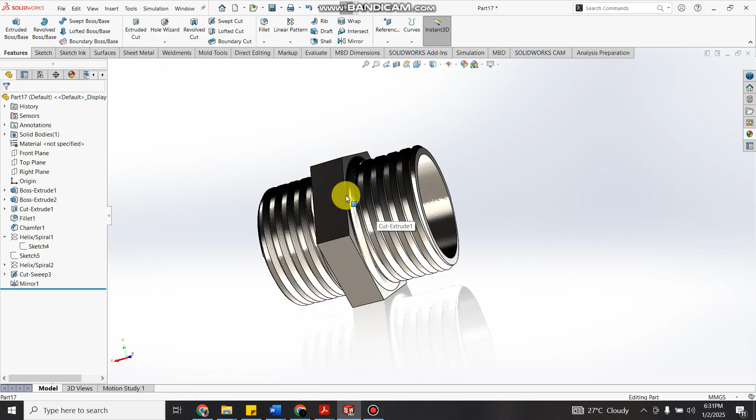Today I'll be doing a little design on a pipe nipple. As you can see, I'm doing a little design on a pipe nipple using SolidWorks. So this particular model was done using SolidWorks from the start to the end. I can show you the basics.

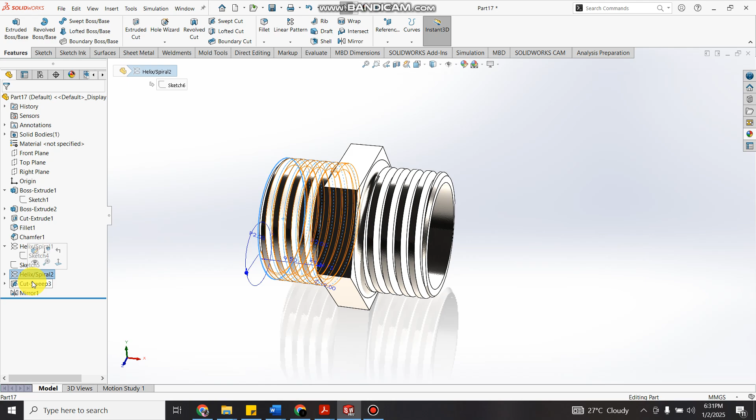From here, sketch, features, come to sketch again, extrude cuts, fillets, chamfer, helix and spiral, sketch, helix and spiral, cut, then you mirror. So please, let's see how we can get this done.

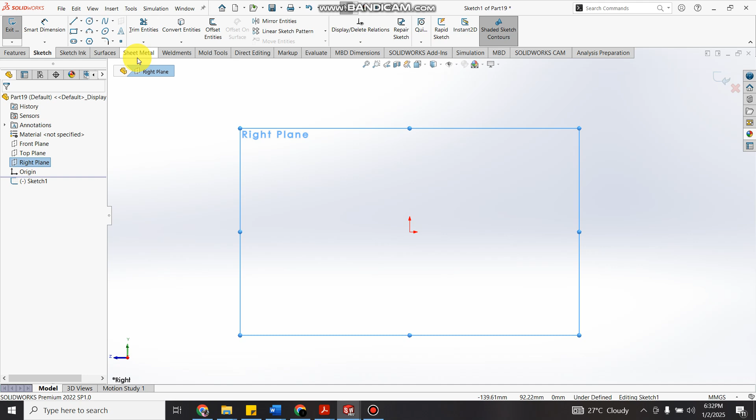Ctrl N, parts, okay. Go to right plane, sketch. The first thing I'll do, I'll go to my circle. I'll click on the circle. I expand. Come here. Come to this point. Dimension it 19.

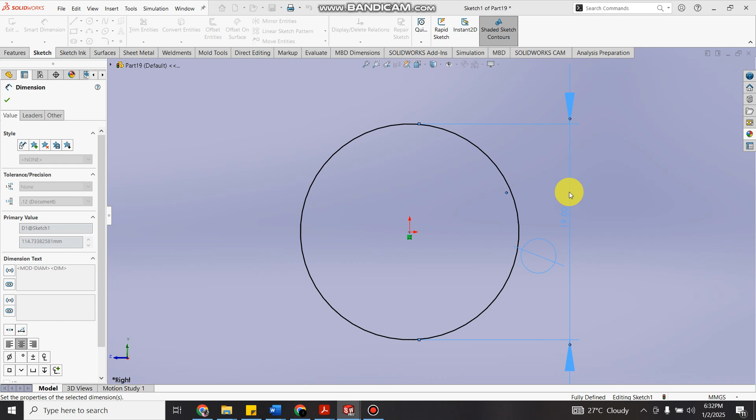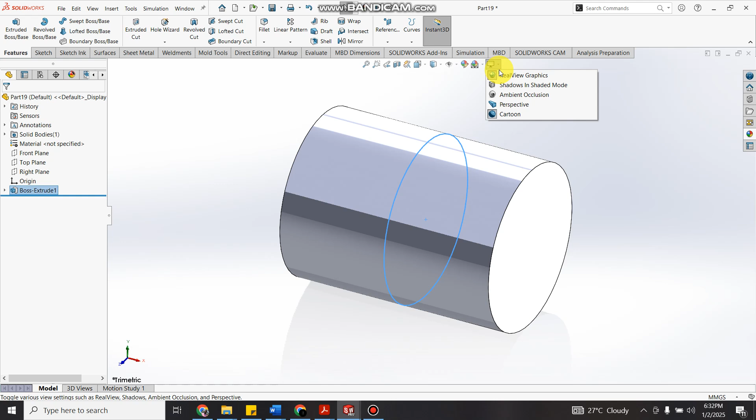After doing that, I'll go to features. Click on extrude boss. I'll make it 25. I'll use a direction of mid plane. So this is how it's supposed to appear. I've been able to get this done, as you can see. Next thing, watch. Use the right plane again.

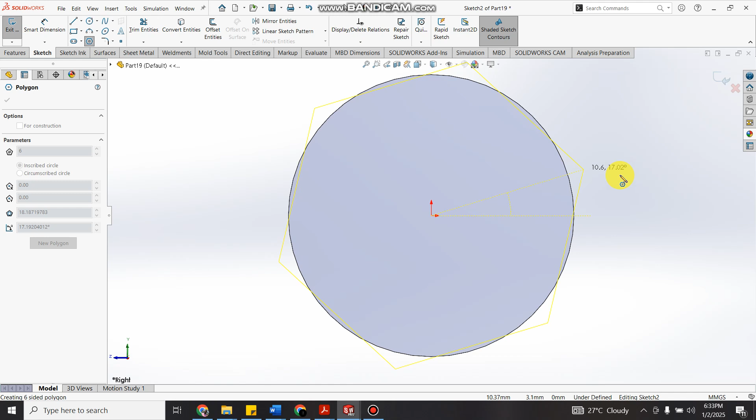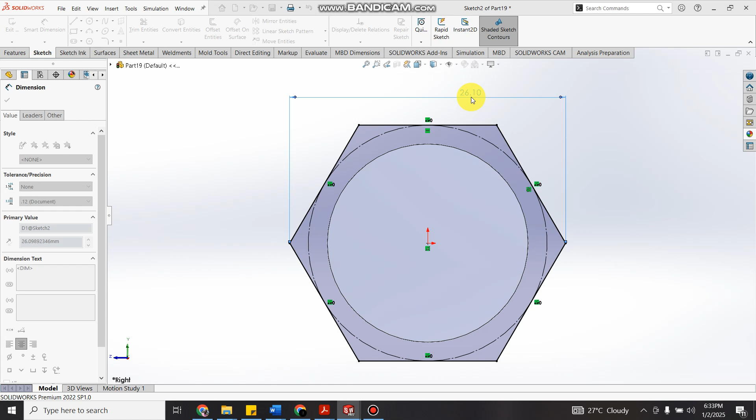Since I want the polygon to be in the center, click on sketch. Come here. Polygon with 6 sides. So let's assume I mistakenly do something like this. I'll click on this. I'll click on this. I click horizontal. I'll have something like this. Then the next thing is our dimension. From this point to this point, I'll dimension it as 25. Check.

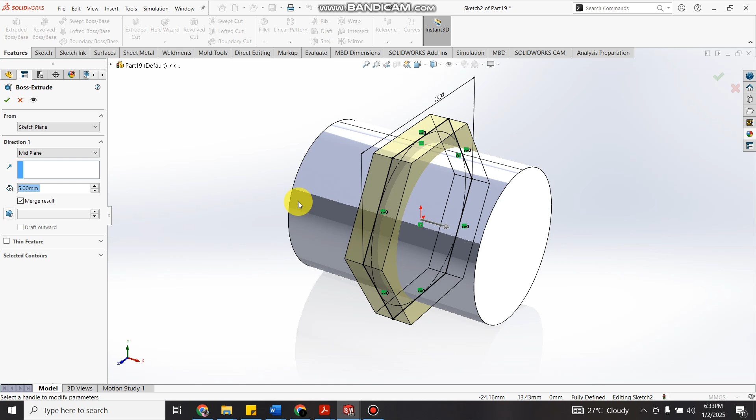I'll rotate mouse, features, extrude boss. The thickness is going to be 5. Here I see 25. Come here and input 5. I should have something like this. So I've been able to get this job done, as you can see.

But the next thing is, I'll come here, click here, sketch. I want to produce the same line. I'll click here, I'll click on convert entity. And I'll click offset entity. I'll click here. Then the thickness is 1.50. Then I'll click on reverse. Check. I have double lines with the thickness.

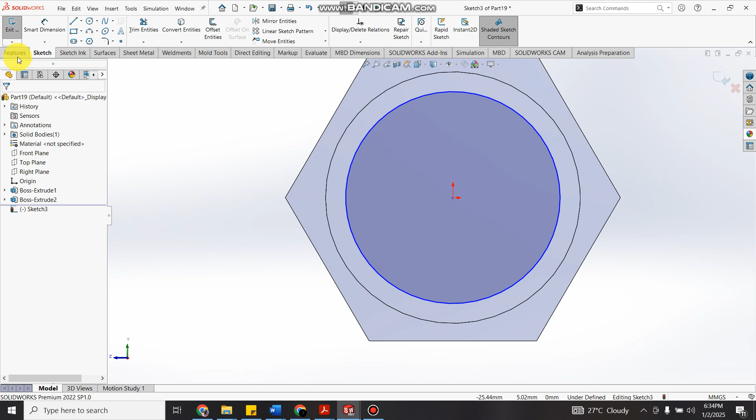I'll go to trim entity. I'll click here, move it a little, and remove that. Then I'll go to features. Extrude cut. I'll click on through all like this, so it appears like this. As you can see, I'll check. Now I've been able to get something like this.

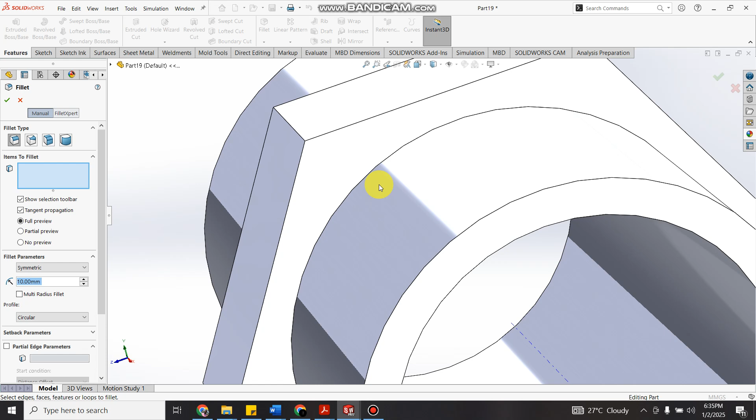Now I'll go to fillet. I'll come here, click here, go the other side, come here, click here. Thickness is 1. As you can see now, I'll check. I should have something like this.

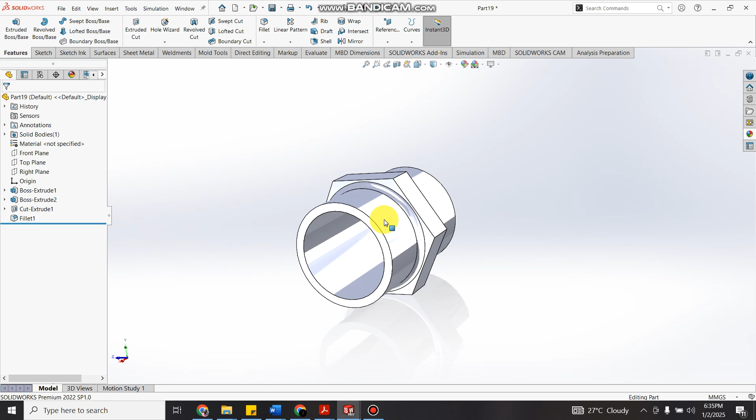And the next thing, chamfer. Drop down arrow, I'll click on chamfer. Now I'll click here. Come to the other side. Come here again, I'll zoom in. And I'll click here. 0.5. Click here. I've been able to get this done now.

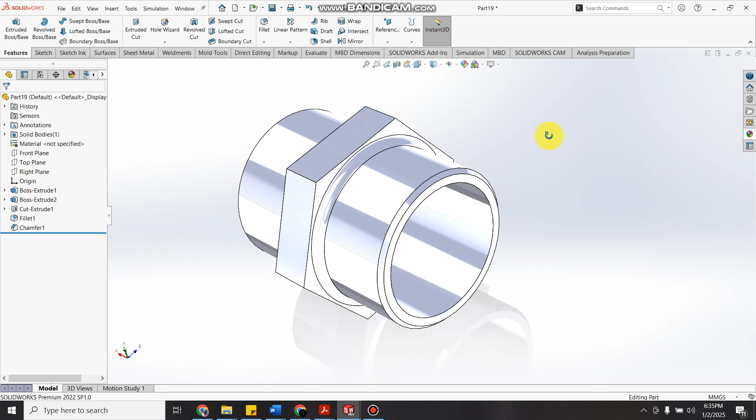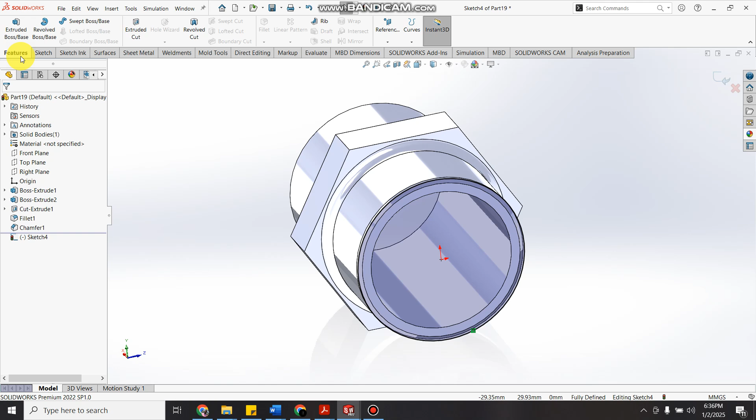So what's the next thing I'll do? I'll click here and click on sketch. I'll just bend it a little. So I'll click here and I'll click on convert entity. Then I click on features, I come to this part, I click on helix and spiral, I input my dimension, pitch 2.0 and radius 4.75, diameter 19, height is 9.5. I've been able to get this. I'll check.

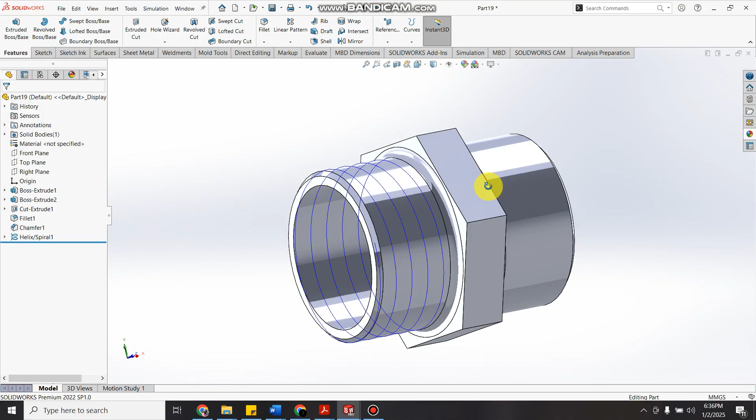After doing this now, I've gotten this. As you can see, I just need to do this side, then I'll mirror it to this direction here. No need for me to do the same procedure. I'll come to this point, use a front plane, I'll click on sketch. I have something like this now. Zoom in. I'll use this, do something like this. My lines. Then I'll zoom in properly so you can see it.

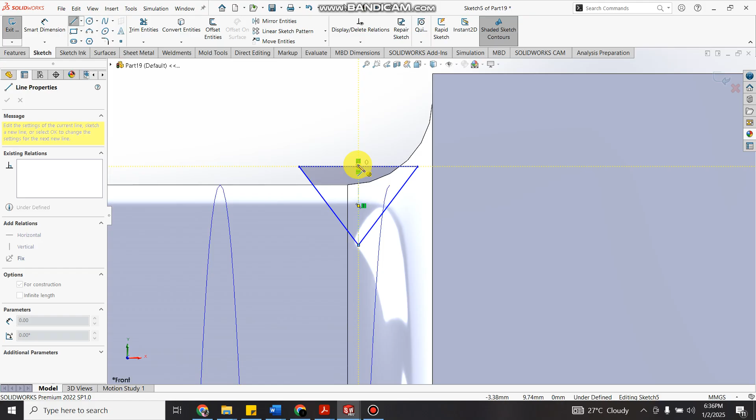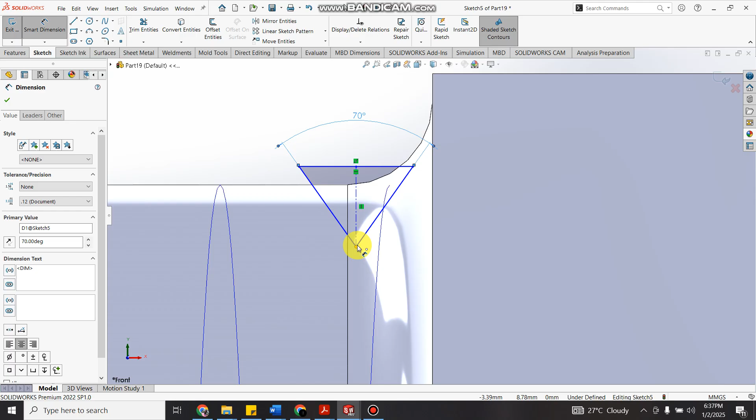I come here, center line. I click on this point and I click here. This should be vertical. Then dimension from here to this side, I'll make it 70. Then the height from this point to this is 1. Then I'll just move it. Since it's not fixed, I'll move it like this. Then I should just rotate it a little just to confirm.

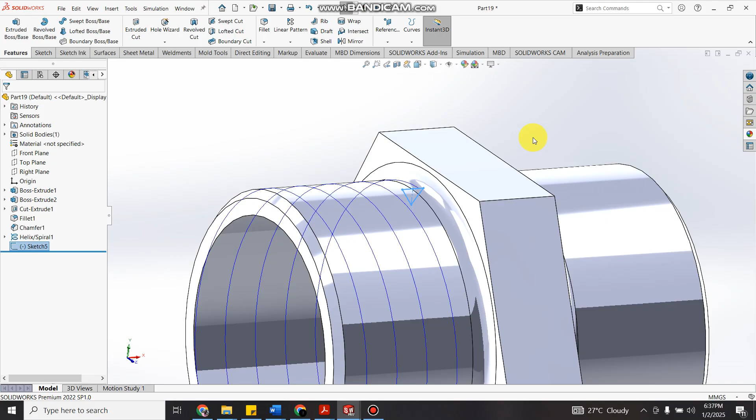I'll click here, check. Next thing, I'll go to sweep cut. This side is already clicked. Come to the path. This is the path it has to follow. I click here. You see this. Then I check. You have something like this. Now I've been able to do this on this side. I don't need to go through the procedure of doing it here again.

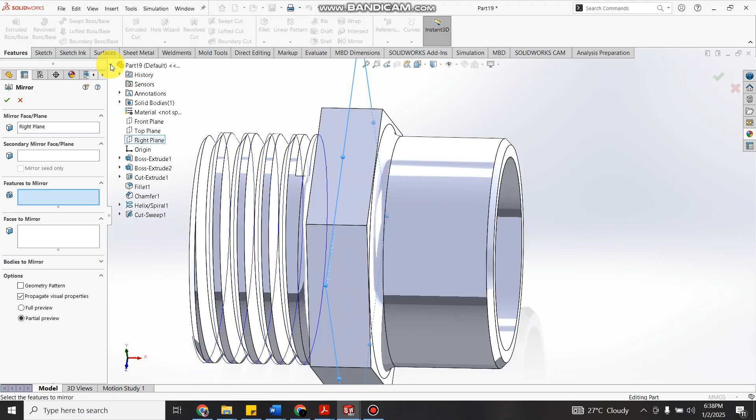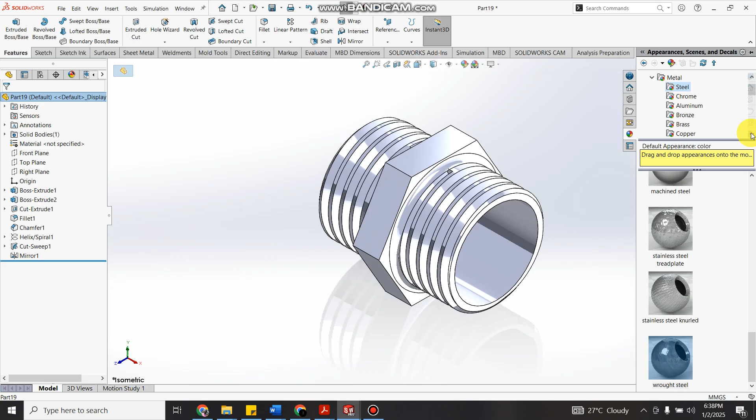So what do I do? I use the right plane because there must be a reference. Then features, mirror. Come here. Click here. As you can see now, I check. So I've been able to get something like this. And you see this line, I don't want to see it, so I'll just click on it, click hide. Then click on the parts, and put a material that I'm comfortable with. So, okay guys, we have been able to do a pipe nipple on SolidWorks.